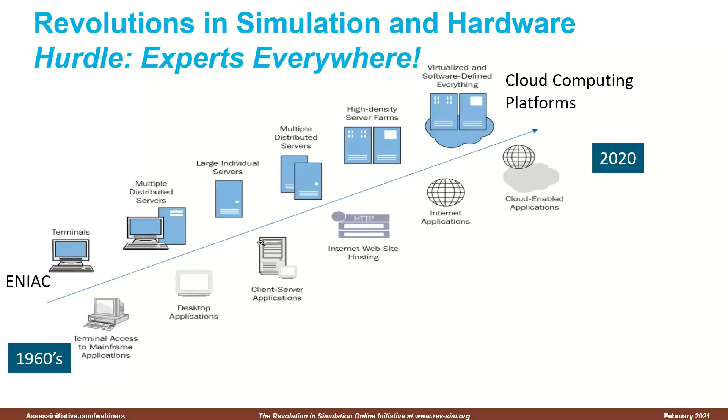Digital computers and simulation software were born almost simultaneously in the 1960s, and simulation software has pushed the boundaries of computing ever since. Computers have gone from the clunky, horribly difficult to use mainframes—boy, I detested those punch cards—to personal computers, to powerful desktop machines and local networks, to ubiquitous cloud computing that's elastic and all but infinite.

Simulation has gone through many evolutionary and a few revolutionary changes as well, from the earliest matrix methods solvers to the powerful finite element analysis software starting with Nastran in the mid 1960s, moving to the era of parallel solvers on vector machines and other parallel hardware that provided a huge jump in terms of throughput and the size of problems that could be handled, to the era of CAD, where CAD entered the picture, radically changing how one could describe the shape of the models being solved.

Around the early 90s was when CAD started, and CAD became the center of all the data required for simulation, moving to a focus on systems and system simulations, doing multi-fidelity and mixed fidelity calculations, moving to multidisciplinary solutions, and then finally ending with the era of enterprise simulation product lifecycle management.

Through almost this entire period from the 1960s to the first half of the 2010s, experts were required to achieve anything useful on both the hardware and simulation software fronts. Nothing was easy or intuitive. Everything required delicate manual fine-tuning. A single large assembly mesh could take weeks of tender loving care to create. Yes, weeks. Validating simulation models often required PhDs for anything but the simplest physics, and data were obfuscated into hundreds

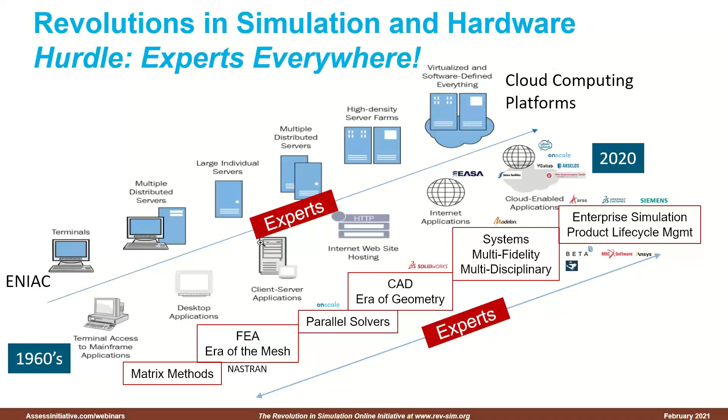of inconsistent and incompatible file formats. What a mess. The fact that the market for simulation software continued to steadily grow despite the high total cost of ownership and the need for high levels of expertise is testimony to the value that simulation provided. And especially for the development of complex products, simulation became essential.

However, the fact that only experts could run simulations left much to be desired. A 2014 study by the UK research firm Cambashi found that worldwide, fewer than 1 million engineers were actually using simulation software. A huge number of engineers didn't have the expertise that was needed to directly leverage the power of simulation. There developed a clear segregation of simulation engineers from all the other engineers.

Simulation engineers had to become experts in not only the general concepts behind the simulation algorithms, but in the use of particular tools that solve particular physics at particular levels of fidelity. And this took a lot of education and a lot of time in the field, creating a high barrier to entry. Hence, the limited supply of simulation experts and the fact that most companies had just a few of them resulted in simulation becoming a well-known bottleneck in the product development process.

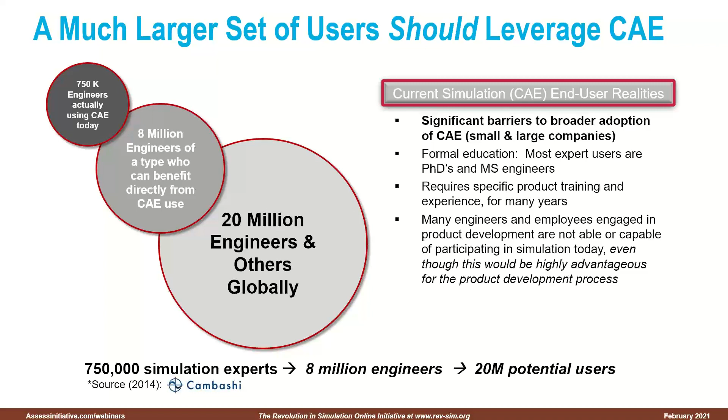And not surprisingly, physical testing continued to be the go-to method to validate designs before they were manufactured and shipped out.

What does it take for a complex, though obviously useful technology to cross the chasm, so to speak, between limited use by experts and mass usage? It's reasonable to assume that technology experts with PhDs and early adopters will always be in very short supply.

Consider the navigation app that's now ubiquitous on smartphones. If one had to be an expert in miniaturized electronics, networks, wireless communication, and GPS and other communication satellite esoteria to use such an application, there would be few takers, if any. However, what makes these apps usable and useful to everyone is that they're simple to use, accurate, reliable, cheap, and highly accessible.

And those, in a nutshell, are the characteristics of a highly complex technology that has crossed over to mass usage. When using the app to go from A to B, you don't have to think about the mind-blowing technologies all working smoothly together over vast distances and in real time to make it all work.

The democratization of a technology is achieved when it truly vanishes from sight and mind. In 1996, Mark Weiser of Xerox PARC, a visionary and computer pioneer, spoke of the upcoming age of ubiquitous computing when technology recedes into the background. He was certainly a bit ahead of his time at that time, but I believe we're entering that era for both computing hardware and simulation software.

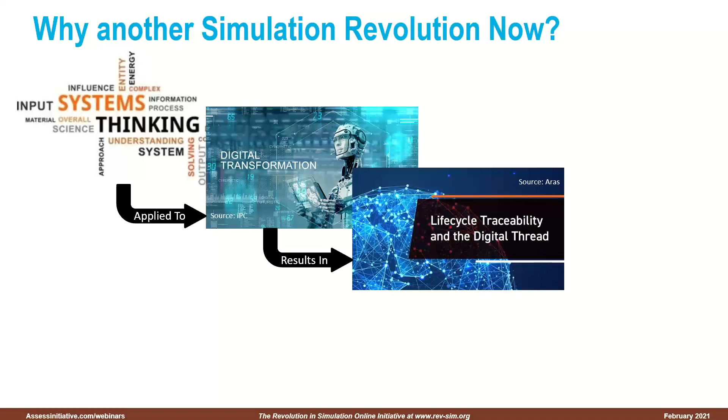When systems thinking is applied to the global problems and goals of enterprise digital transformation, an important result is the need for an end-to-end digital thread of connected data across the entire life cycle of the enterprise and its products. And in addition, systems thinking, when applied to complex products, is empowered by the existence of pervasive, on-demand system simulation for the entire enterprise, closely and completely integrated into the digital thread.

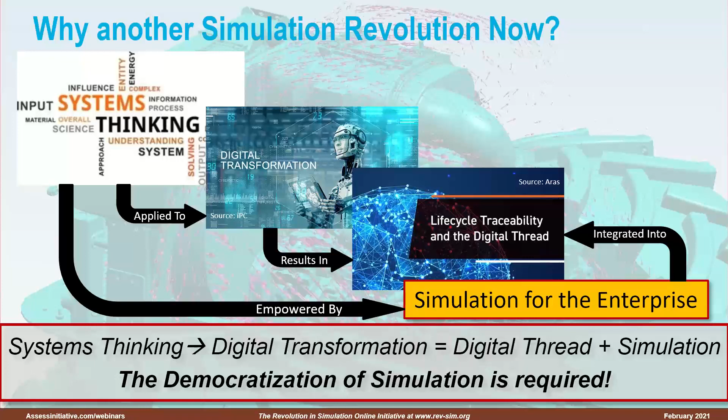It is this new visibility for simulation, a driver for key corporate initiatives such as digital transformation, and the acknowledgement of its importance at the highest levels of the enterprise, plus the exploding demand for it beyond just the experts, that has fueled this latest revolution. The democratization of simulation is required and well on its way, with simulation experts and simulation automation playing absolutely critical roles.

Now, while evolutionary change is constant and happens gradually over time, revolutionary change requires much more motivation and often occurs relatively quickly. Circumstances need to be dire before revolutionary change is forced to occur. Humans resist change, unfortunately. So this is never a simple process.

In the case of simulation, the most recent demand for revolutionary change came from other new and exciting technologies that were essential ingredients of strategic corporate initiatives. For these technologies to work, they demanded the rapid automated execution of many orders of magnitude more simulation than the status quo could support. That experts were needed to run most simulations manually was simply infeasible and unacceptable. Robust and accurate simulation automation is no longer nice to have, but essential.

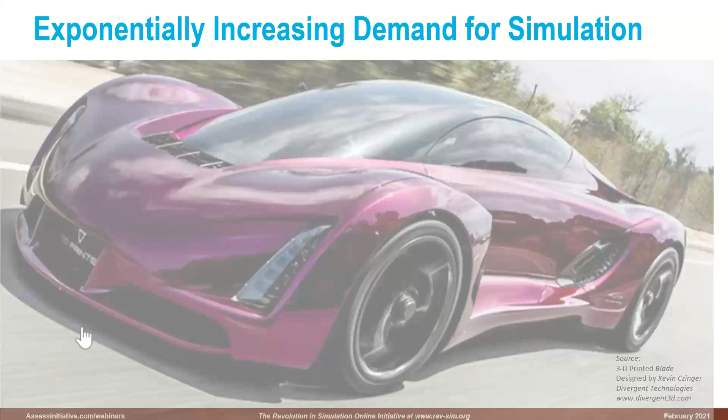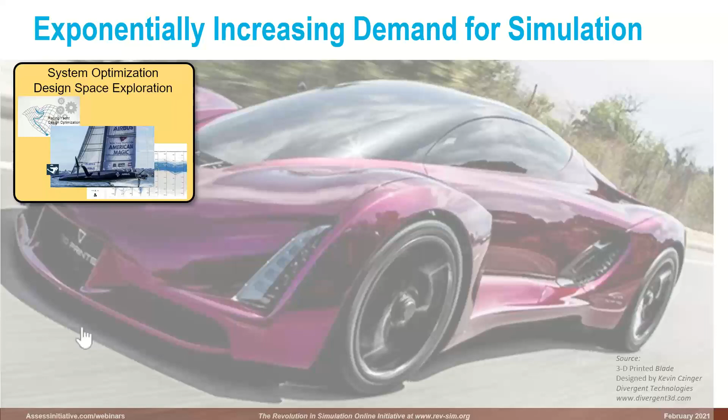And so, why is the demand for rapid and robust simulation automation going through the roof? There's huge increased demand for system optimization and design space exploration, requiring large amounts of automated simulation. There's the need to use simulation to create huge amounts of data that drive the machine learning algorithms that are essential for introducing artificial intelligence into the product development process.

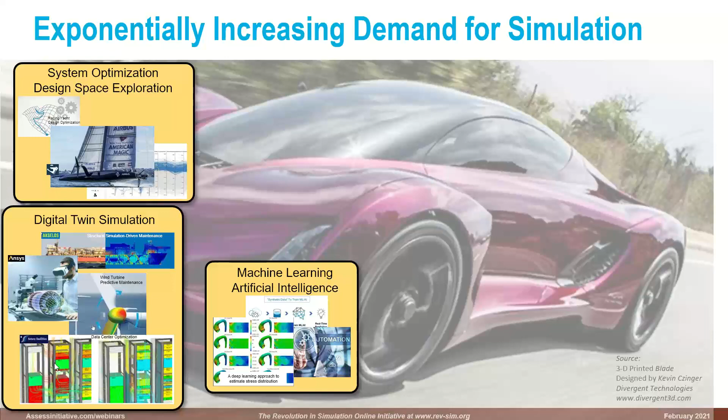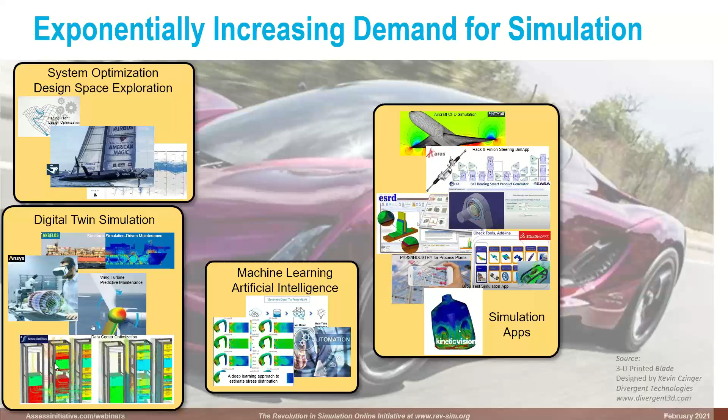A focus on digital twins, hundreds, thousands, or even millions of products in the field that need to be monitored and simulated to do predictive maintenance and to help improve their designs going forward. The whole area of simulation apps, the need to create simple, graphical, highly targeted, fit for purpose applications that speak the language of the user and not the simulation experts, allowing users to run very complex simulations and do what-if analysis in targeted areas.

The exciting new field of generative design, creating those wonderful organic shapes, all of which need to ultimately be simulated to ensure that they are structurally, thermally, and otherwise fit for purpose. The field of additive manufacturing, allowing you to take those fantastical organic shapes and manufacture them much more easily than you ever could in the past. However, simulation is needed, and lots of it, not only to optimize those additive manufacturing processes themselves, but to do quality control.

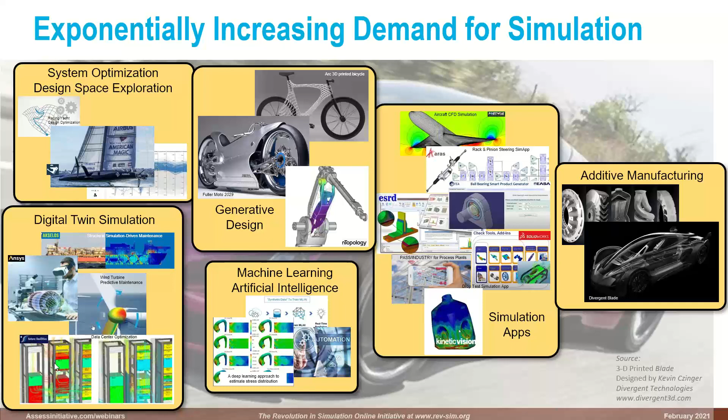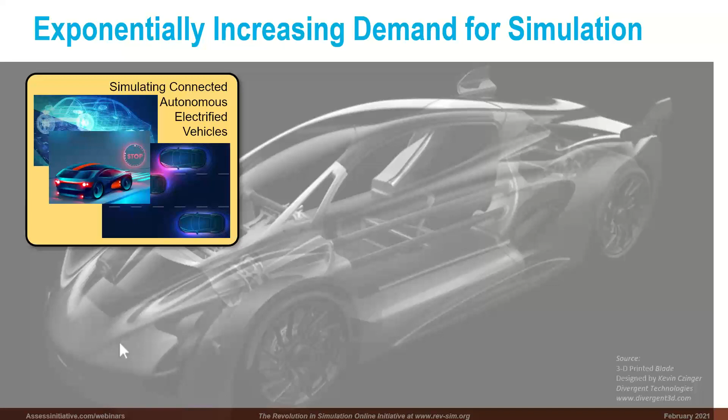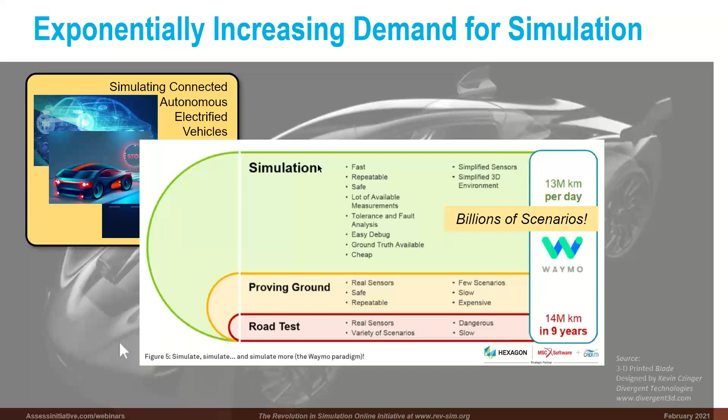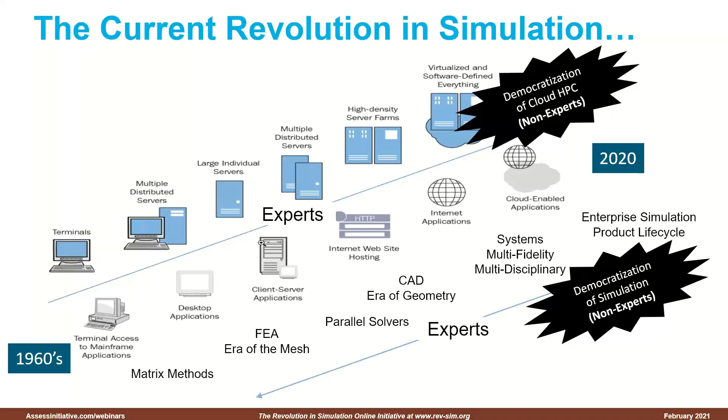Manual, time-consuming simulations done one expert at a time, one model at a time, just simply doesn't cut it anymore. We're now in the midst of this revolution. The goals are simply stated: to increase the use of computing power and simulation by orders of magnitude, driving the experts to create robust and safe simulation automation templates that can be used by anyone or any technology that needs it. Yes, simply stated, but not necessarily simple to implement.

Ironically, while the opponents to freeing up the use of simulation have been the experts, this explosion of the use of simulation beyond them makes these high-priced and scarce simulation experts exponentially more valuable. Now, they're not constantly swamped doing the mundane day-to-day simulations, but work on packaging them safely for extensive use using rigorous simulation governance principles, and also on the really hard cutting-edge simulations that are always required to move the discipline to ever greater heights and utility. Now, to me, that sounds like a heck of a lot more fun.

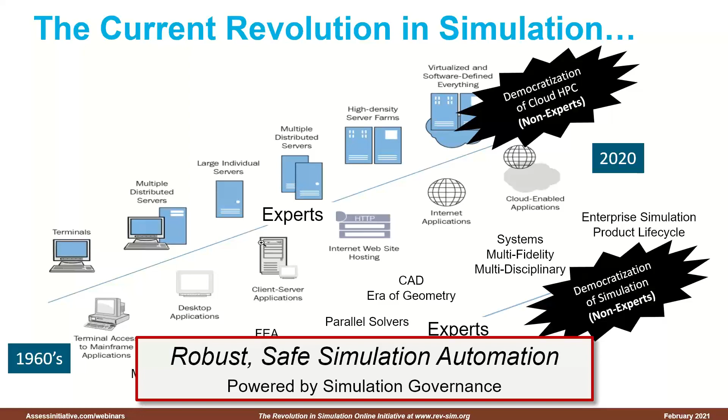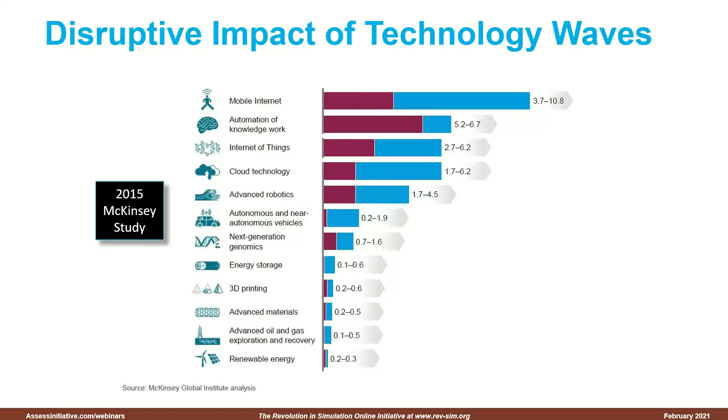Now, this interesting 2015 McKinsey Institute study captures this revolution we're in the midst of through the lens of its estimated economic impact 10 years after the study in 2025. What you see is a list of the cutting-edge disruptive technologies that they then believed, this was 2015, would have the greatest economic impact in 10 years. And right near the top is the automation of knowledge work. And in fact, it has projected a huge economic impact. Its low level of $5.2 trillion in 2025 is the highest of all of these listed technologies.

And this is exactly where simulation automation and the use of automated intelligent algorithms fits in. The reason automation of knowledge work was estimated to have such a tremendous impact is that it is required. This automation is required to move any complex technology to mass usage. And this is the crux of the revolution that we're now undergoing in the simulation world.

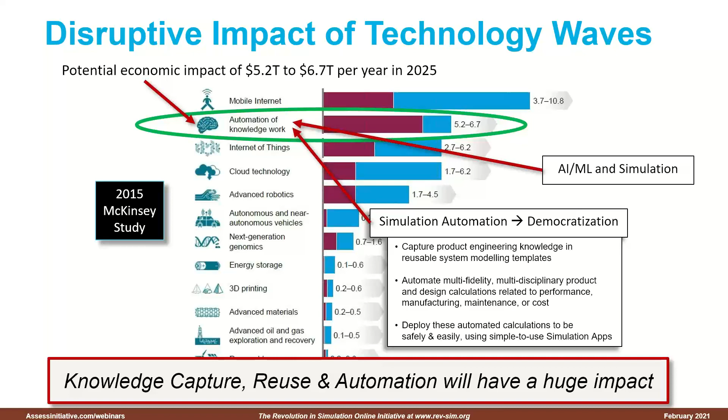There are some key elements of this revolution, and I've listed a number of them here. Starting out with something fairly esoteric, under the covers plumbing: the need for tool-agnostic data models to define data for simulation. For too long, simulation data have been locked into proprietary and tool-specific formats, and this is what's required to unlock the power of automation. Simulation governance, which is absolutely essential to ensure that all those automation templates are robust and accurate. Simulation automation itself, an absolutely key underpinning technology that's required by everything else that needs these gobs and gobs of simulation.

Democratizing cloud computing, the same parallel revolution that must and is occurring on the hardware side, because all of the other gains in simulation are going to be meaningless without the ability to have cheap, elastic, and infinite computing power. Democratizing simulation itself, the ability to have robust, accurate, and safe simulation available for non-experts. More intelligent algorithms, generative algorithms, such as the ones seen in generative design, automated optimization, etc., that aid engineers in finding optimal solutions. The brand new introduction of machine learning and artificial intelligence to take huge amounts of simulation data that have been generated over the years and turbocharge decision making.

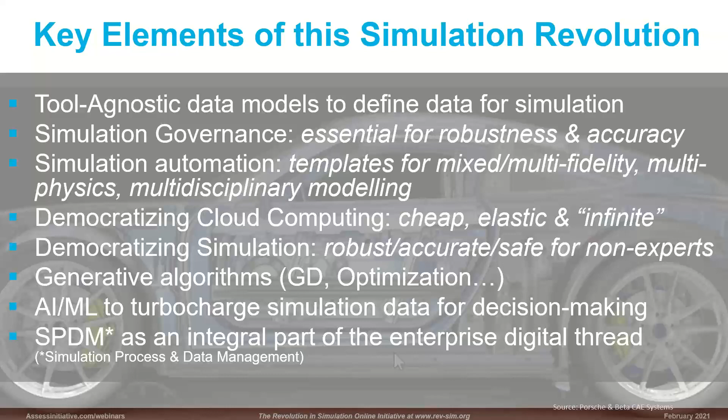So where can you learn more about next generation use of systems thinking and simulation? Why are these topics now deemed critical for successful enterprise digital transformation efforts? Why are we now graduating from a narrow, siloed view of simulation to a much more holistic view that encompasses the entire enterprise and its partners and supply chains? These are the organizations where you can get some or all of these answers.

The granddaddy of them is, of course, NAFEMS, formed in 1983, and now the recognized authority on all things simulation. They have a practical approach to simulation, training engineers in the basics and understanding how to best use the tools. Decades of simulation engineers have been trained by NAFEMS, which boasts a truly global presence. INCOSE followed, not too far behind, with a focus on systems engineering and systems modeling best practices, what we now view as a linchpin to a systems intensive approach to product development. More recently, the ASSESS Initiative was formed by Joe Walsh and a group of industry visionaries to shine a light on the technological, cultural, and business hurdles to the democratization of simulation.

And finally, the baby of the bunch, the Revolution in Simulation online community, now with almost 3,000 members and followers from around the globe, and around 20 sponsoring companies that deliver cutting-edge simulation software, services, and expertise to help achieve the goals of this revolution in simulation.

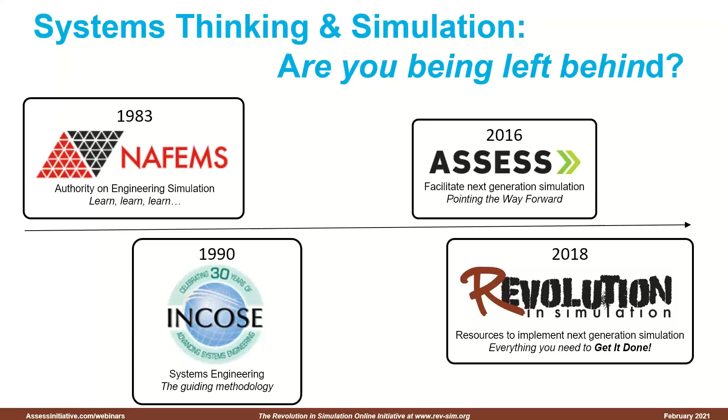So let's talk some more about this Revolution in Simulation initiative. It was launched at the NAFEMS CAASE conference in 2018. This online community and resources was founded to fill a critical gap. It is a free web portal that gathers in one online space all the resources that you might need to take your simulation investments to the next level.

It focuses on next-gen simulation usage, helping your organization to maximize the impact of simulation on your business goals, including but not limited to the democratization of simulation and simulation automation. So let's take a quick look at what this website looks like.

Here's the main page with some high-level topics leading you to case studies and the webinar series that we're now conducting. This area here keeps up to date with what's happening in the simulation industry, provides you with an easy one-stop place to go find things. Series of blogs that are often penned by the moderators that have been helping grow this community and its content, and some of the key resources that were just recently posted on the site.

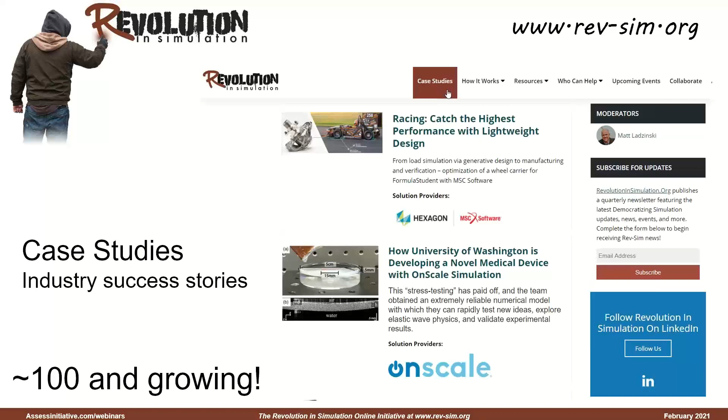Pretty wide range of software, wide range of industries represented by the end users, wide range of tools that are used and companies involved. Everything from traditional and complex products to data centers, generative design solutions, multi-physics computations in the web, etc. Please join the community and contribute your own success stories.

A number of industry leaders have volunteered their expertise, knowledge, and time to be moderators over these last 3 years of a growing list of topics of interest. They curate freely available materials and reference them on the different topic pages. You can access these under the How It Works menu. I'm sure you recognize many of the people who have volunteered their time to help with this community.

With the help of the moderators and our community, we've gathered together a large trove, hundreds of resources that you can access under the Resources tab. Here, you can access webinar recordings, blogs, articles, presentations, white papers, and even journal articles from a variety of sources. Very few of these are actually stored on the site. The site provides a short summary of a resource and then points to its original location on the web. So please contribute resources that you think would be valuable to the community.